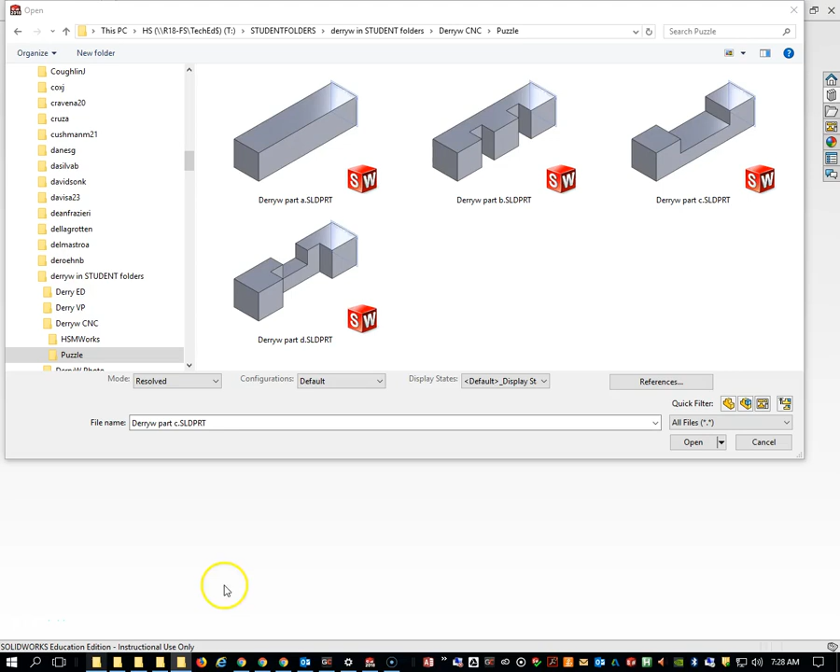Okay, once we've created all four parts for the puzzle, we're going to put it together using an assembly, and then we're going to throw some dimensions on it and then get started on building this thing. So I'm in SolidWorks, and I'm going to get started with a new assembly.

I'd like you to take a look at your folder. Right click, make sure you're viewing them as large icons, and make sure you have this labeled as part A, the one with no notches. Part C has got the one single wide notch. Part B has got a pair of notches, and part D has kind of got a notch on either edge here. So that's what we're looking for.

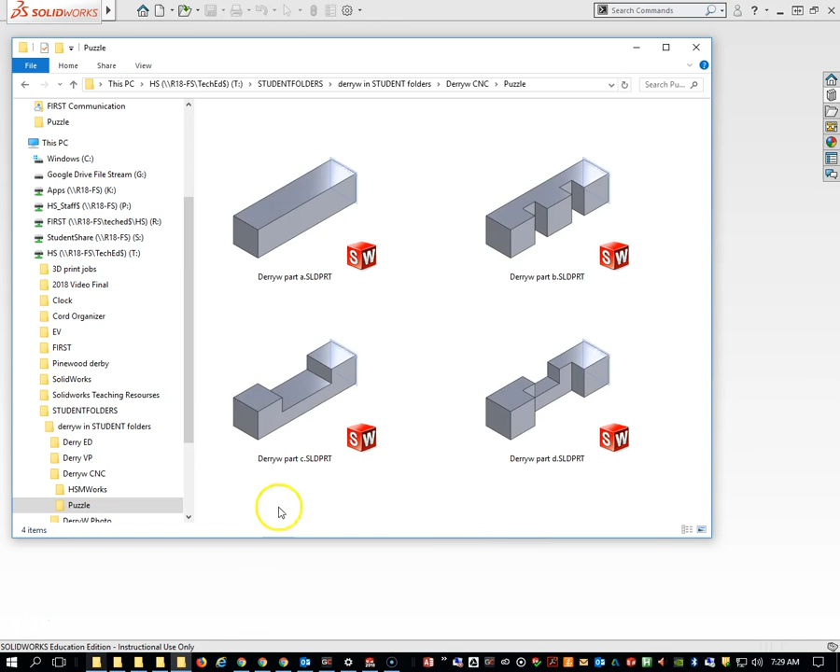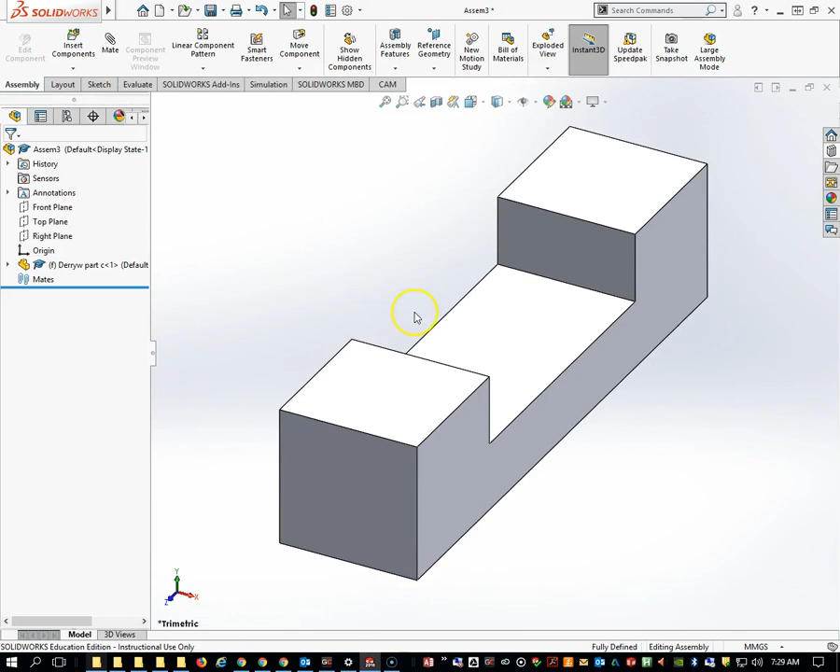Now let's get started with building an assembly. So we're going to go to File, New. In this case, we're going to pick an assembly, and we're going to pull in our parts. So I'm going to pull in part C to start, and just click. And if you hold the Control button down and click on C and drag, you can make another one. So we're going to need two part C's to get started.

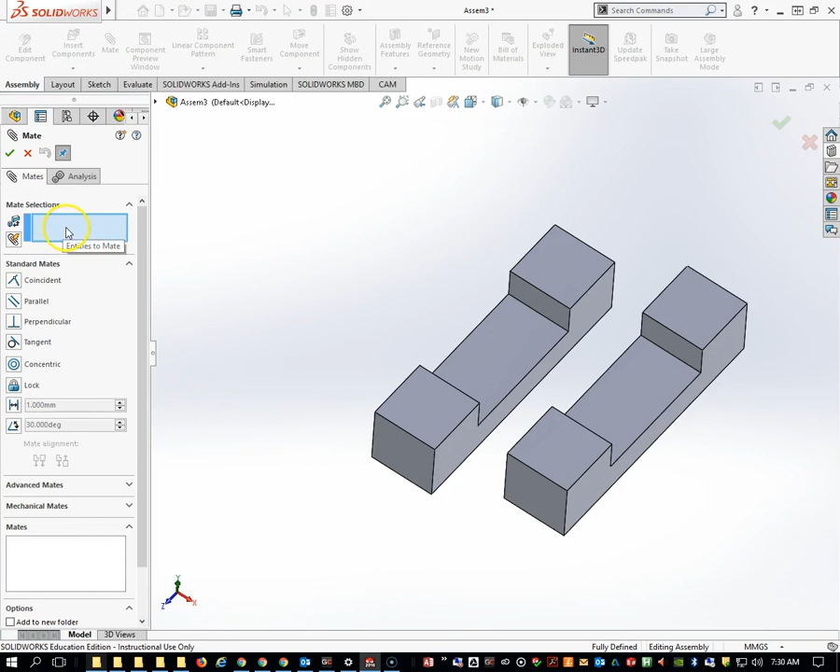And the instructions are going to have us put these two pieces together with that hole in the middle. So let me show you how that works. Up here under the Mate command, click on Mate. Make sure that you have nothing selected. You can right click and clear to make sure you have nothing selected to start.

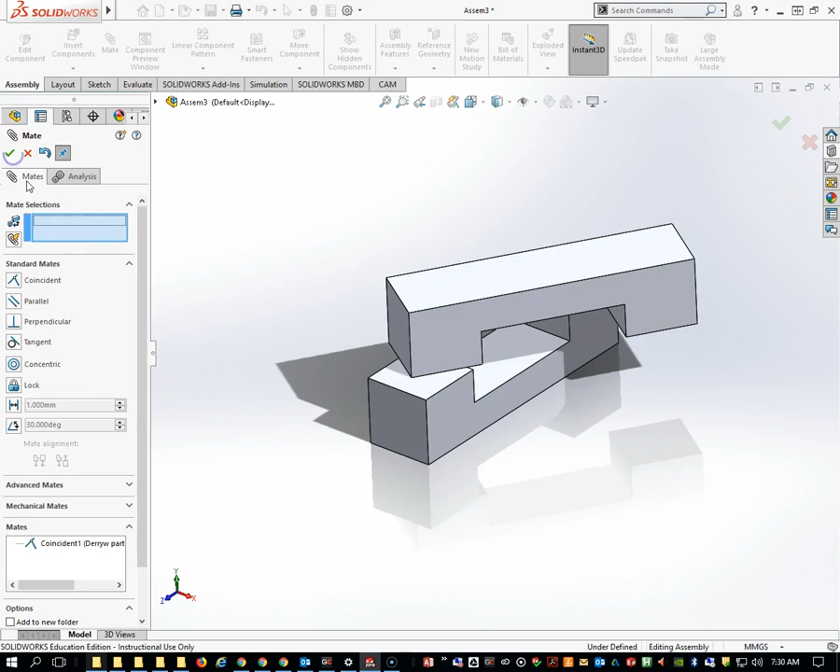I'm going to click on this surface and this surface, and I don't like the way it locked those together. So if I come down here and click on this button, it'll flip it over, and that's what I'm looking for. So then I need to come up here and hit the checkbox. In this case, I'm going to select this one and this one, and I do want it to go like that, so I'm just going to hit the checkbox, and then this one and this one, and we've got part of our puzzle built.

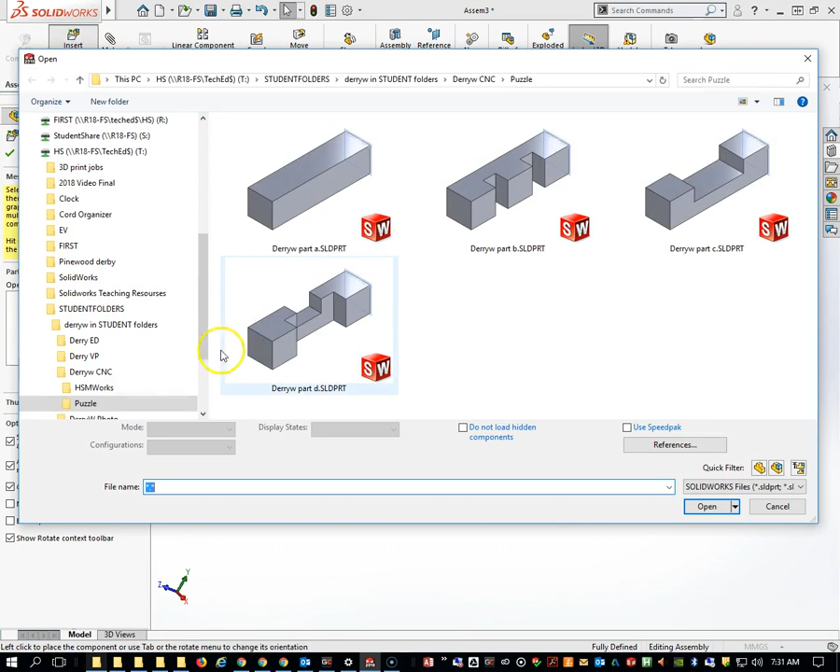Okay, I'm going to close out of the Mate command, go back into Insert Components, and grab part D. Open that up, click. Once again, I'm going to hold the Control button down on my keyboard, click on D and drag so I have two of them. We're going to mate this one in a similar way, except we want to make sure that both of the notches here are facing up.

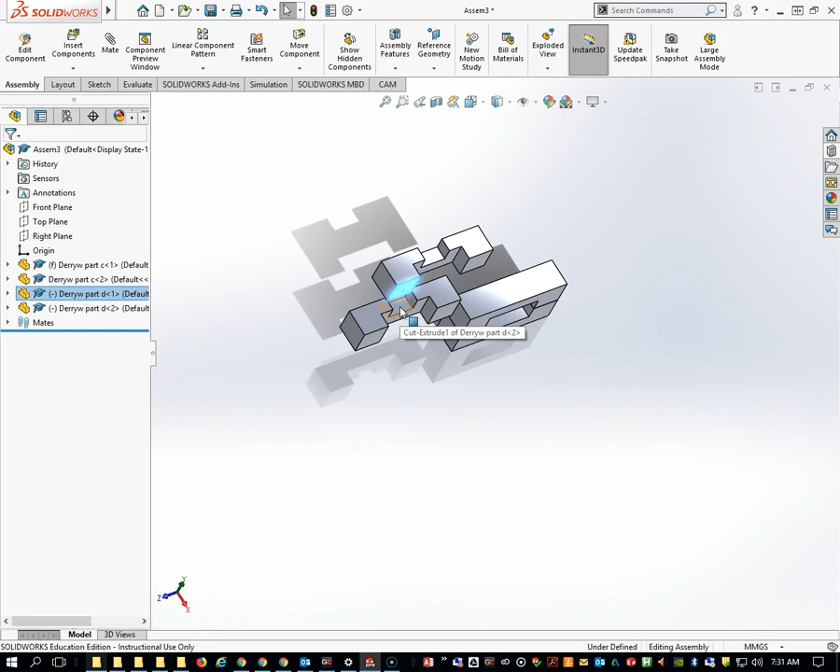So we're going to go to Mate. I notice that it selected that face already. I'm going to clear it just to make sure we select the right faces. I want to put this guy to this guy, and I'm going to flip it again. So that looks good. Hit OK.

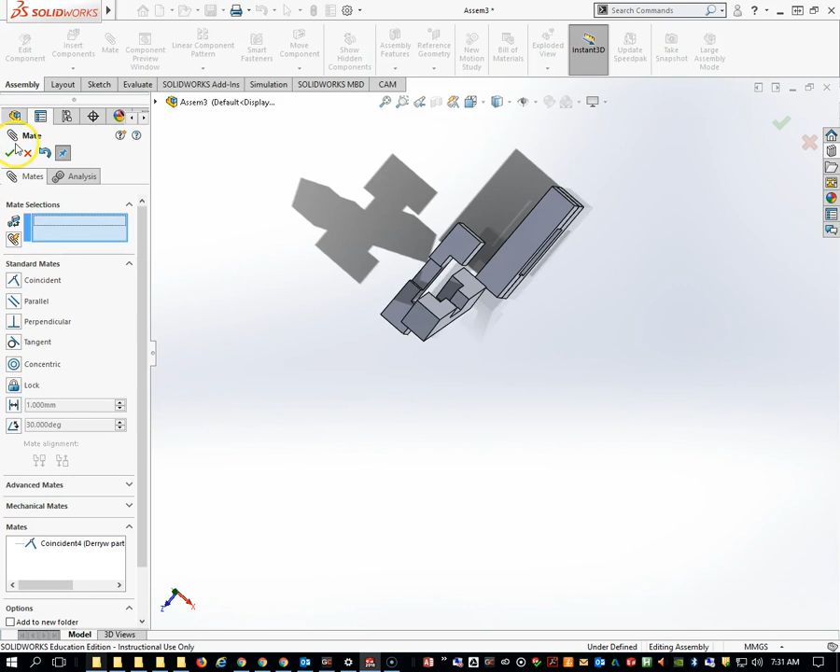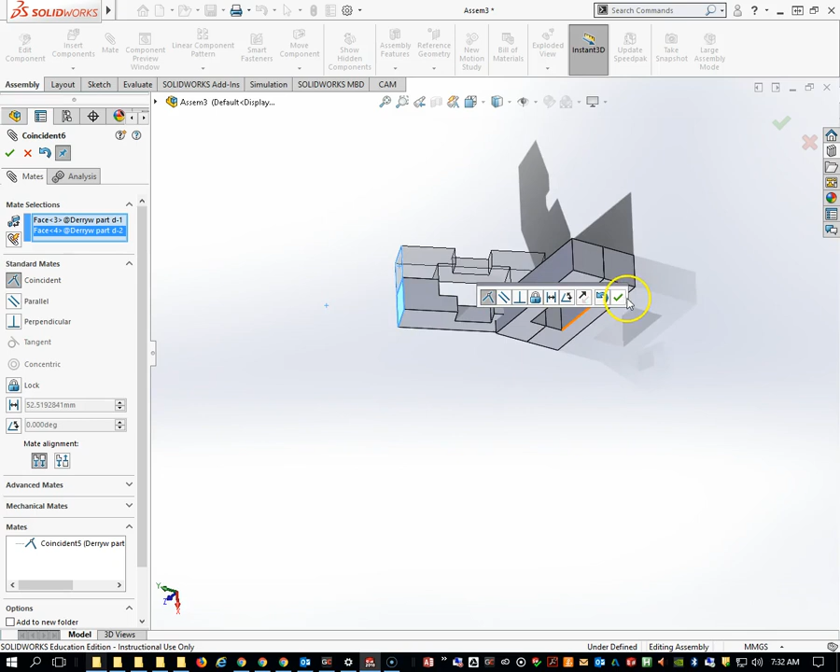I'm going to hit Mate again, and in this case I want this surface and this surface to be even. Whoops, I lost my Mate command. These two even. Hit OK. And then I'm going to come in and select this one and this one, and we've got the parts D mated as needed. So now we're going to get started on building the rest of this burr puzzle.

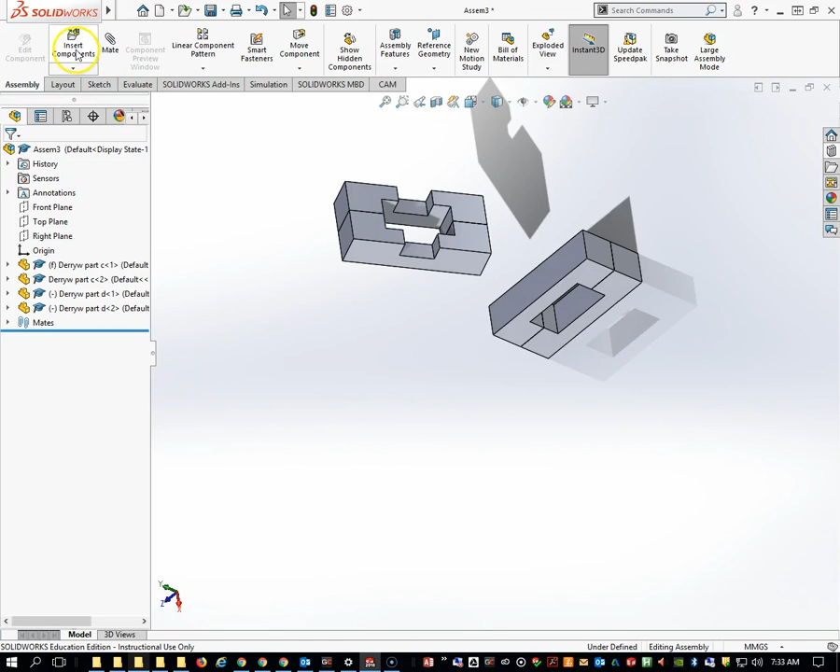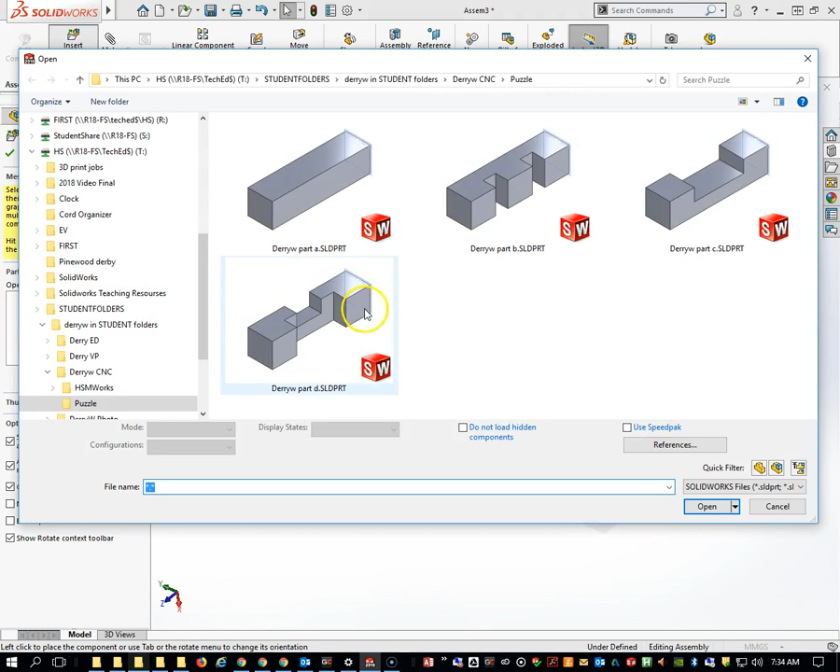Okay, we need to bring in some more parts. We need to bring in A and B. So we're going to go to Insert Components up here and click on A. Actually, I could hold the Control button down and select both of them at the same time. Hit Open, and if I click and then click, it's going to bring them both in. Whoops, I forgot to click a second time, so that's this guy. Alright, so we have all the parts we need for our puzzle.

We now have to keep going with the assembly. And I think we need to place the C pieces through the hole in the D pieces, and these are the D's, so we've got to take these guys and put them in here. So let's see how that's going to go.

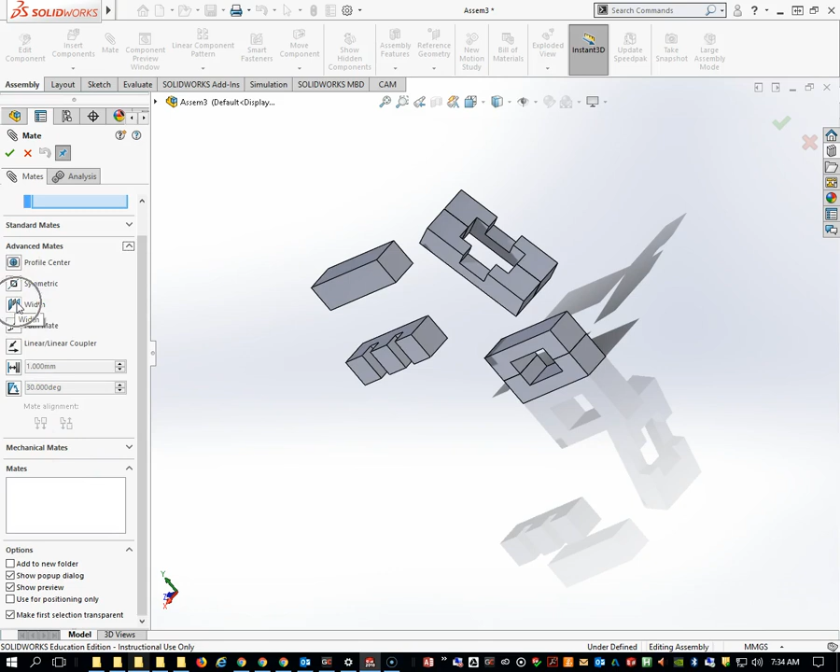What I'm going to do is go to Mate, and go down to a different type of mate, advanced mates, and pick the width mate command. In this width mate command, we need to make four selections.

I'm going to select this and this, and then I want this and this to go inside there.

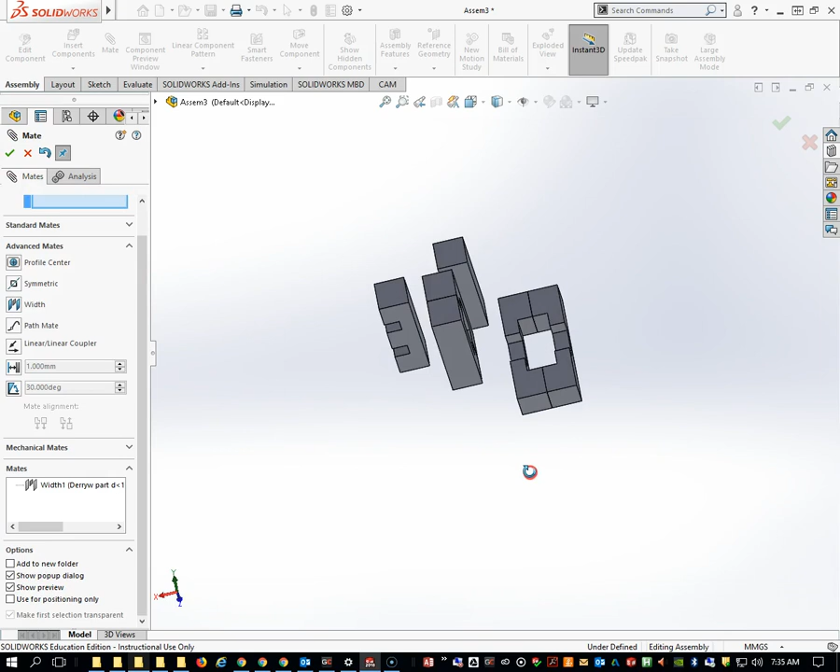Hit OK. We can do the same width command again, and in this case I'm going to pick this side and this side. You need to pick them in pairs, and then this side and this side.

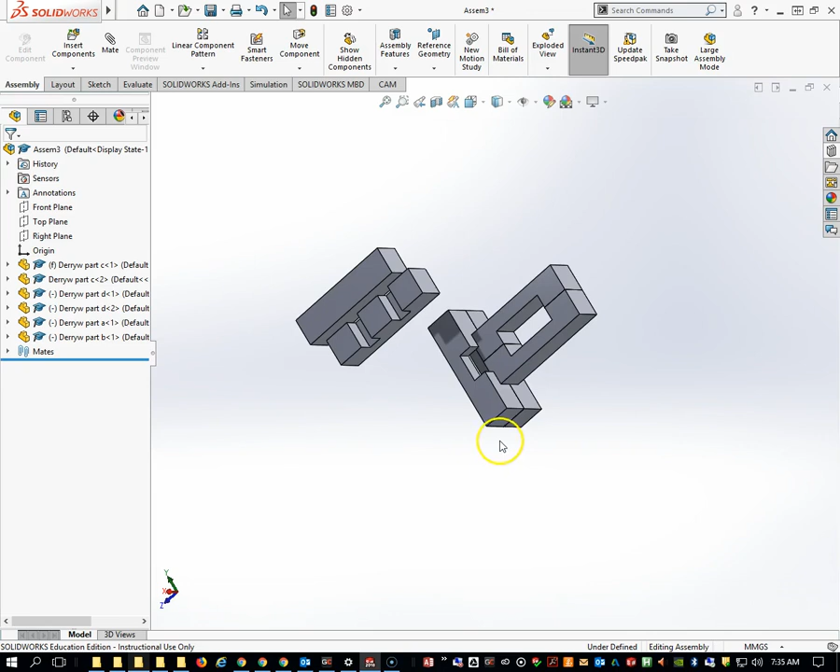Now if you take a look, this part can slide. I've got a fixed part here, so I'll leave that fixed. This part here can slide up and down around that.

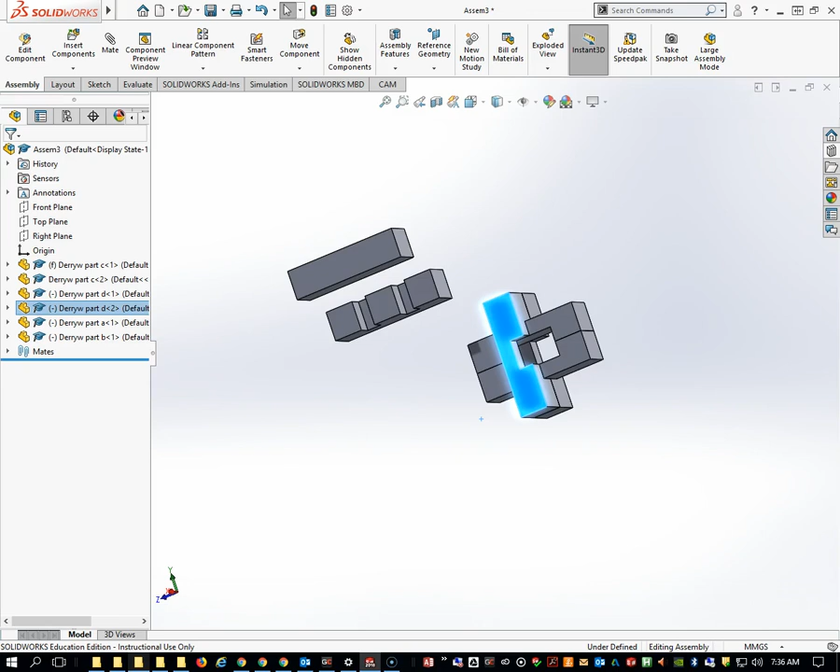So the next assembly we need to do is put part B into the holes of the C's, being sure that the notched side of B faces the unnotched side of D. This is the unnotched side of D, and this is the part we need to put in there.

So I'm going to select this and this. Oops, I need to get the mate command again. Clear that. Go to advanced mates again.

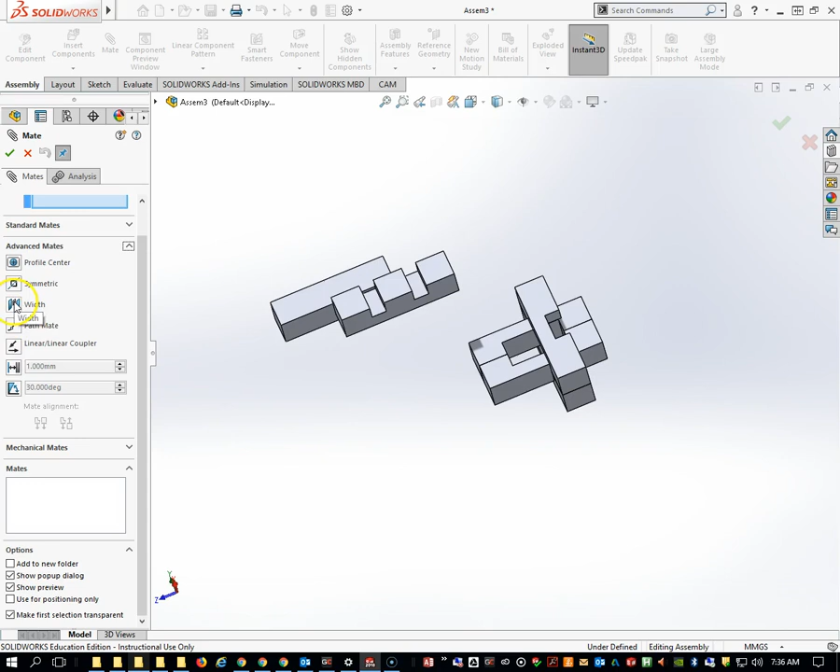Select width mate, and we're going to select this guy and this guy. And then I'm going to select this one and this one.

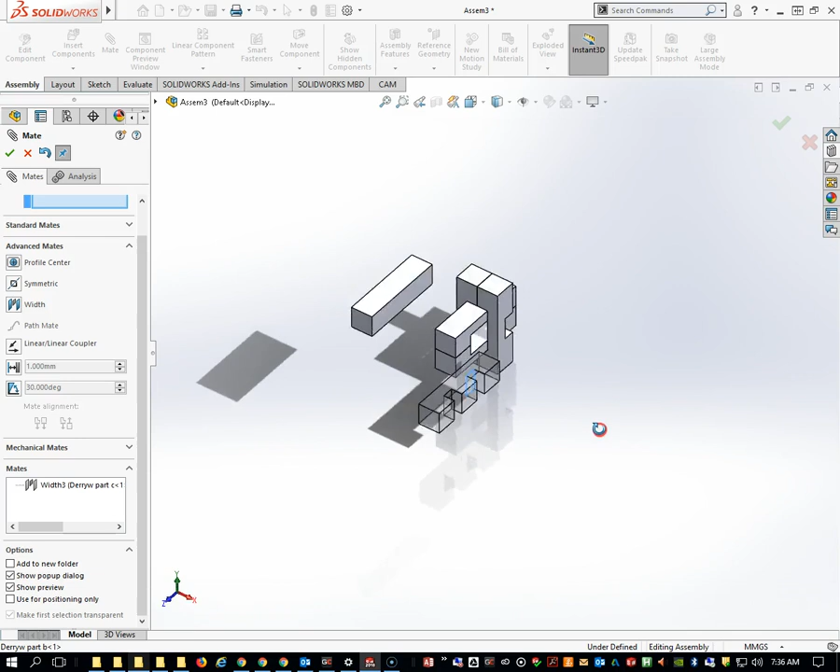Now, that's not oriented the right way. But if I take this face and mate it to this face...

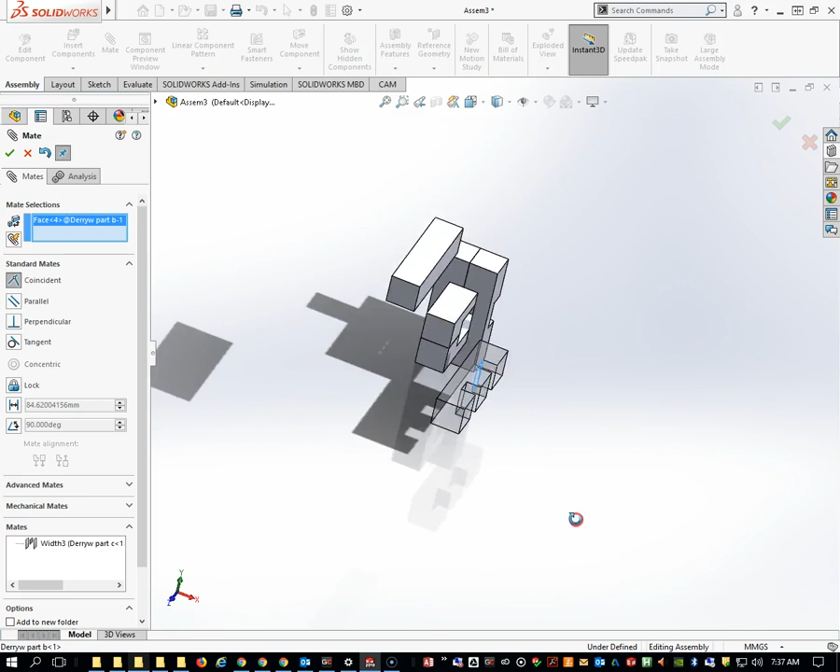In standard, let me clear that for a second. Clear selection, go back to standard mates, go to coincident, select this coincident one right here, and we want this guy to be coincident with this guy. Alright, that works.

This can still move side to side. We could throw another width mate in there under advanced mates.

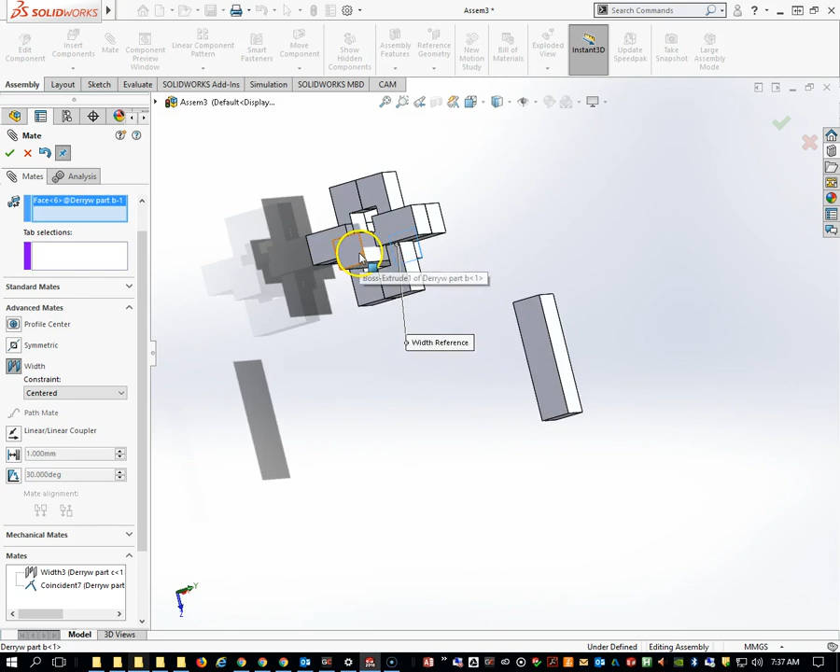I'm going to say width. I want this guy, hold on a second, please, and this guy to go with this guy and this guy. Hit OK. Alright, we're most of the way there.

So you can see that this can slide back and forth. We're going to slide this into here, and put this last piece in, and our puzzle is going to be built. We're going to put this last piece of the puzzle in, and we can use the width commands or coincident commands.

Doesn't really matter. I'm going to stick with the width command for a bit here. So I'm going to click on this width command.

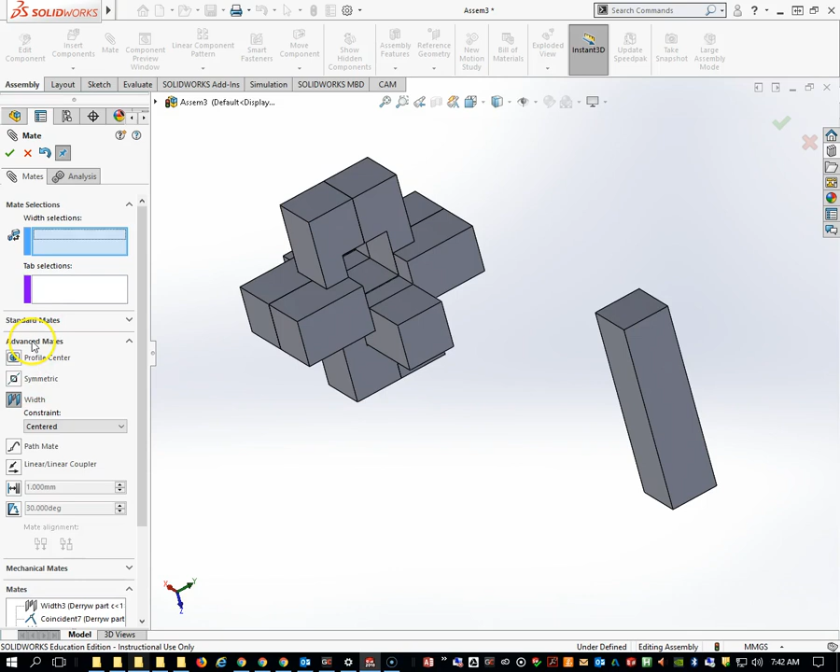Remember that width command is in advanced mates. I want this side and this side to fit inside of this side and this side, and that locks those up.

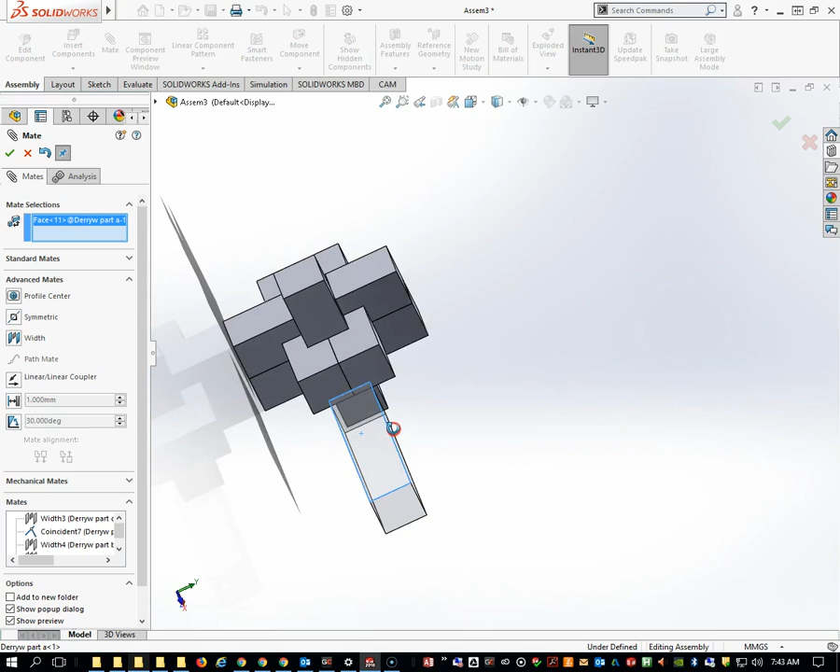Hit OK, and I would like this and this. Whoops, I need to hit the width command again.

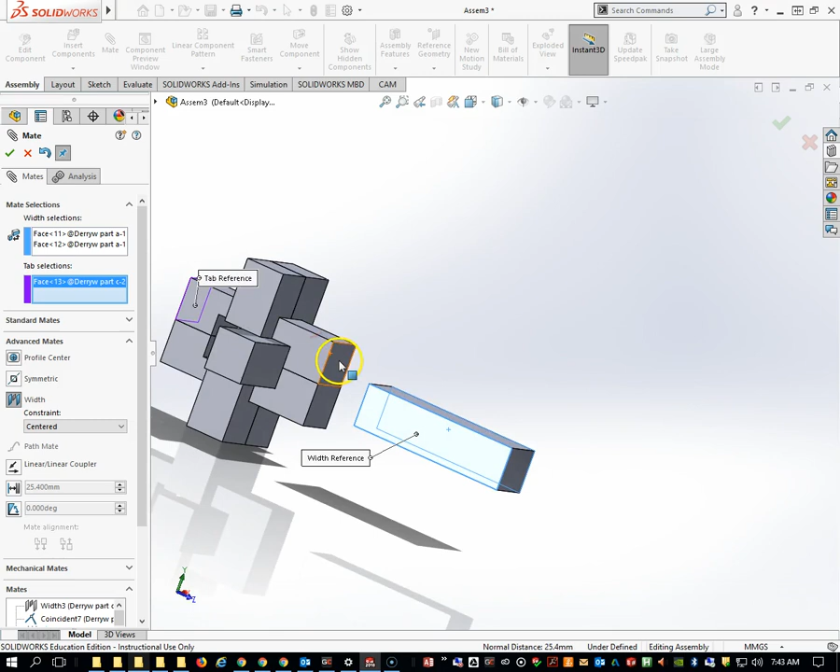This guy, I picked the two outside pieces there, and I can pick anything. Well, not anything, but I can pick these two, and it will put it in between there.

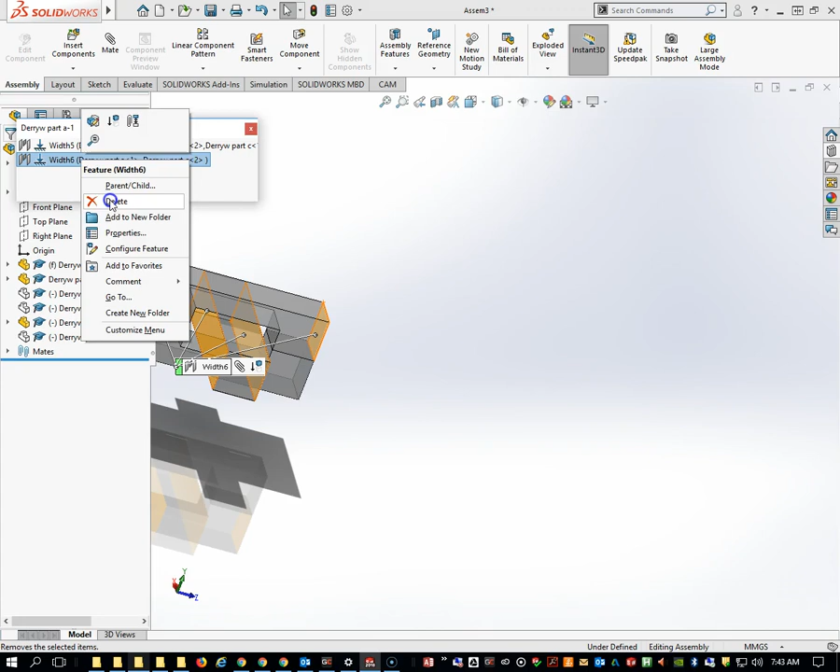Oh, that puts it in the center. I didn't want to do that. So how do we get rid of a mate that we've put in? If you click on the part and then right click, you can show the mates, and I want to delete that one. There we go. I should have picked different items to be between.

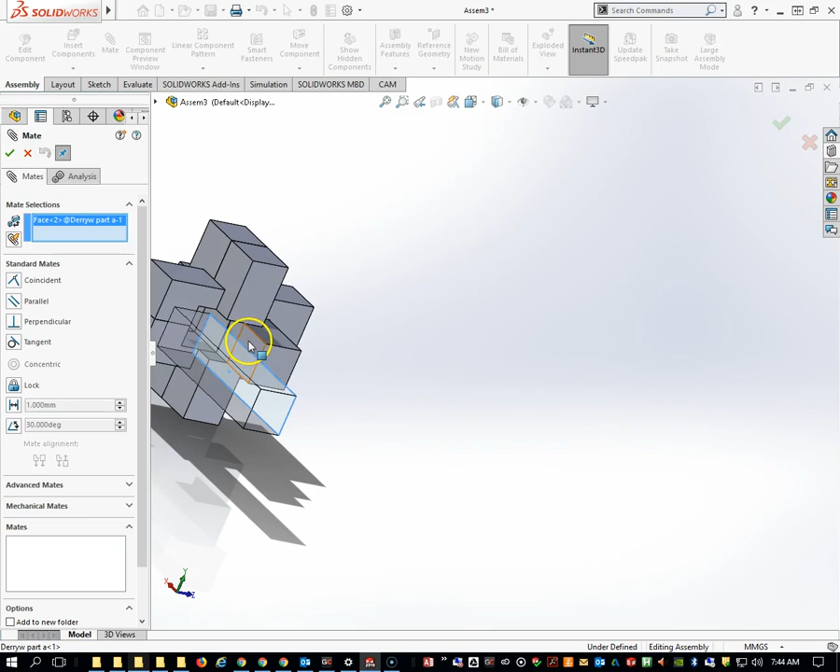Instead, I'm going to use coincident mates to make it a little bit easier. So we're going to go to mate, select this guy. Whoop, clear that face, wrong face. This one and this one. Hit OK. Then this one and this one, and OK.

And we've got our burr, and it's assembled correctly.

Next video is going to show you how to pull this assembly into a drawing sheet, and then create a bill of materials, and then we'll pull in each individual part and start putting some dimensions on it.